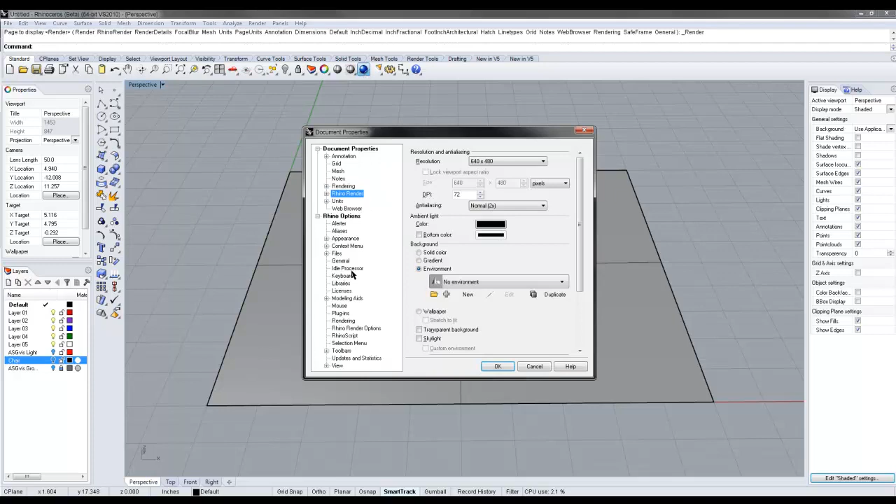The way you go about installing a plugin, you'll right click on the render globe, then go down to plugins and install it. Select your plugin, in this case Rhino Hair, then click OK.

It's as easy as typing Rhino Hair, selecting my object, and then you're given a bunch of options, ranging from 0 meaning no effect all the way up to 1, except for the length which you can set to whatever. The first thing it's asking is how many strands I want. This is a 10 by 10 plane I'm working on, so I'm going to set the length to 2, and put a variation of 0.8 to really give it a lot of variation.

Segments means how many segments I want in the bend of each hair, so I'll make this 4. Gravity, let's crank this up to 0.4. I think that looks good.

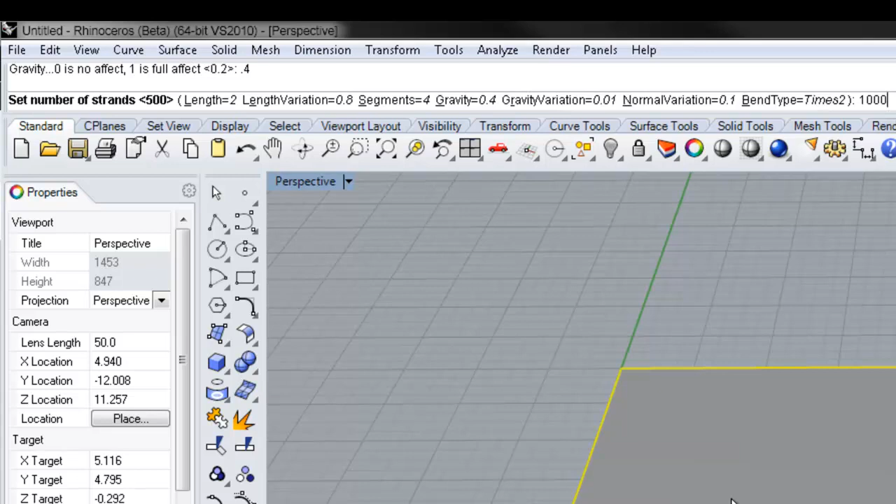Now the number of strands, we'll put this at 1,000. Because these are meshes and not NURBS, there's a little less data to calculate, so it goes a bit faster. I can hit enter and it's going to ask the width of the strands. Now I've got this set to 0.125, so 1/8 of an inch. I think we're actually going to set that up to 0.25 and let it hit.

You can change the width, the taper, and how many sides this thing has. Sides means how many meshes, because this isn't a cylindrical mesh, it's actually segmented. When this finishes generating, each hair will have 4 sides to it versus infinite, which would be a perfect circle. This is how it makes itself so much faster, it's doing a faceted circle versus a true circle.

So let's let this cook. It goes through a few points: first it generates the points, then it generates the strands, then it generates the meshes, and that's what it's doing right now, calculating that. Obviously the more strands you have, the longer it's going to take. And it's just wrapping up here.

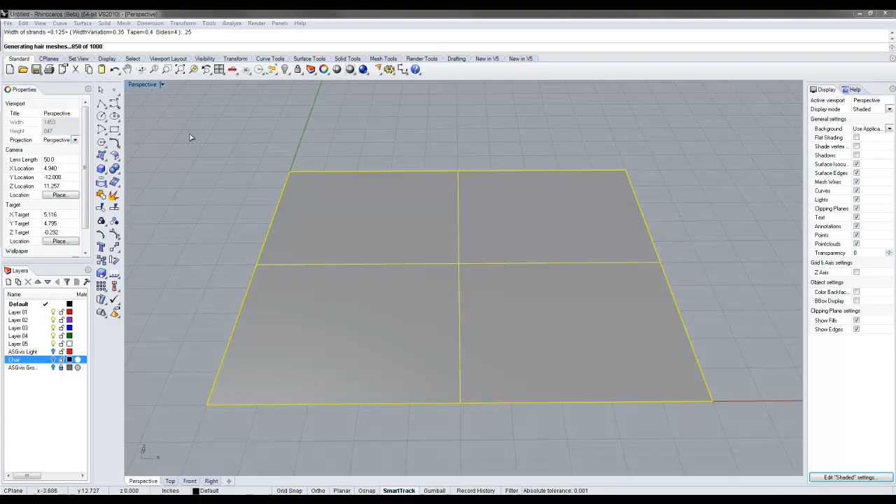All right, so we've got this big old noodle bowl of hairs here. Now you can see what's going on, the sides of these hairs all have 4. From far away, it looks pretty good actually, and it's kind of cool.

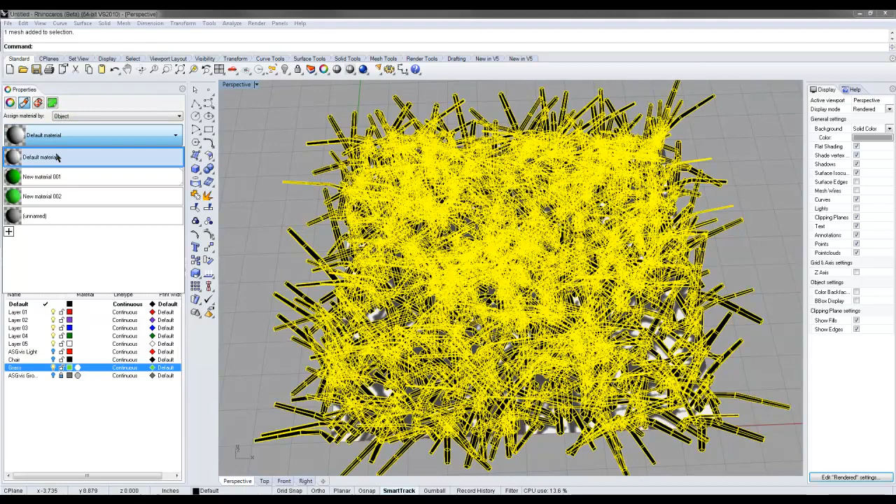Let's add some color, we can even give this some sort of green here, I've got just a base color I could use. So you can kind of see how, from far away, you could start tiling this up. We'll do an array here, a 5 by 5.

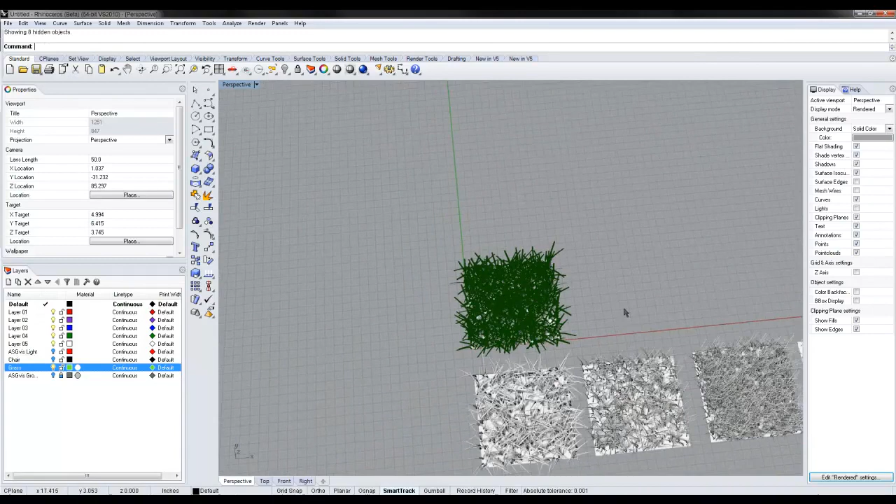And you can start to make some cool textures. This is great for carpets, great for grass, and you can even play around with all these settings to get a whole bunch of different looks out of the same thing. You could get a stubble look, different densities of grass, or play with the length and make it really furry.

I've even made a chair, which is a bit bigger of an object, but by playing with the gravity you can really start to make some fuzzy looking stuff.

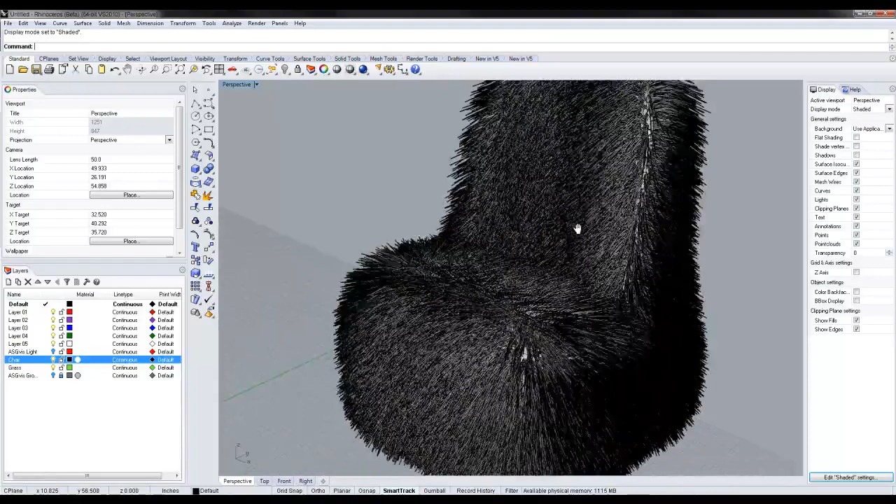So I thought you guys might enjoy this. The link for the beta again is down below, let's see what you come up with. And again, Damien's site, liquidtectonics.com, you can download FurGen, which at 89 bucks for this plugin is a pretty good deal for everything it does. It has a lot more control with all the different variables you can play around with. Man, that thing looks cozy.